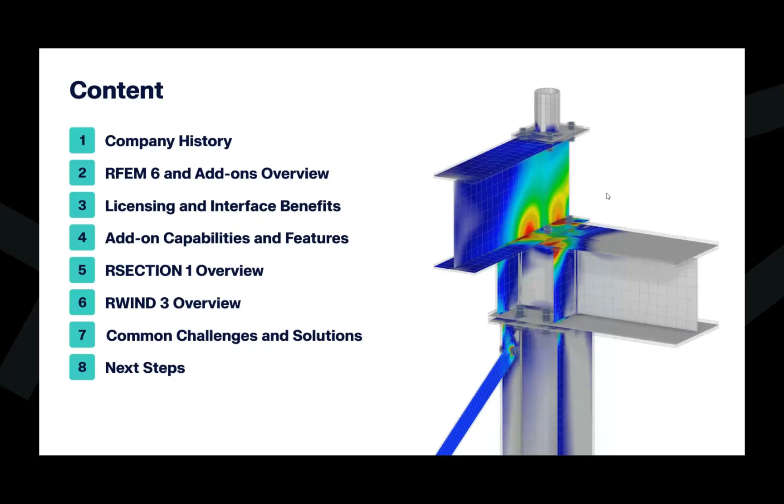So we'll begin now with a little bit more about the company and the history. Dlubal Software was founded in 1987, so we're by no means new to the structural analysis and design software market.

But in the summer of 2015, we opened up our USA subsidiary office in Philadelphia. As it stands now, our company has over 300 employees devoted entirely to the Dlubal program, so we're certainly not trying to balance hundreds of different programs - the structural engineering software is our main focus. Since establishing this office in 2015, we've been able to grow our customer database to over 250 offices throughout the US and Canada.

So now moving on to RFEM 6. This is going to be the flagship of the software that we offer - our general FEA program that we'll continue to dive into the details here for the structural analysis and design. For those of you not familiar with our software, RFEM 6 is the base program.

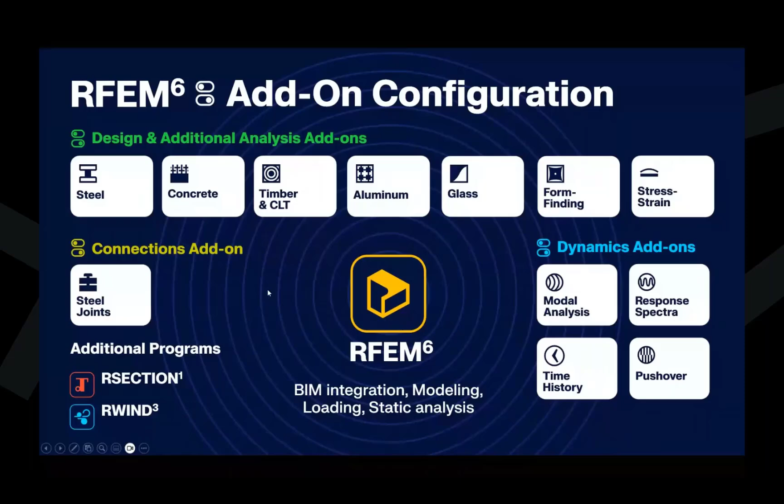So we'll talk about a few benefits of RFEM 6 licensing. We still offer the ability to outright purchase your license. A lot of companies have done away with this, only offering subscriptions, but we still offer this perpetual license option. You can choose to do a subscription, or you can even rent for a shorter duration, such as 1, 3, or 6 months.

As mentioned, with this modular concept, this allows us to create affordable software specific to your design needs, so you're not purchasing capabilities that you don't necessarily use in your day-to-day design. We also moved entirely to cloud licensing for this new version, so it's very easy to share the license between multiple users in the same company, or to access at home or at work.

We also release a new program version every single Monday, which is definitely different than a lot of those competitor programs out there. The reason we're doing this is because we're putting so much effort into new features, developments, code updates, and program fixes that we want to make accessible to you every single week.

We also have a reliable support team located here in Philadelphia with our engineers, so they're able to answer any questions you may have. If you've ever visited our website, dlubal.com, you'll also find access to hundreds of free online webinars, technical articles, FAQs, and more—not just for existing customers, but also for anybody interested in testing out the program.

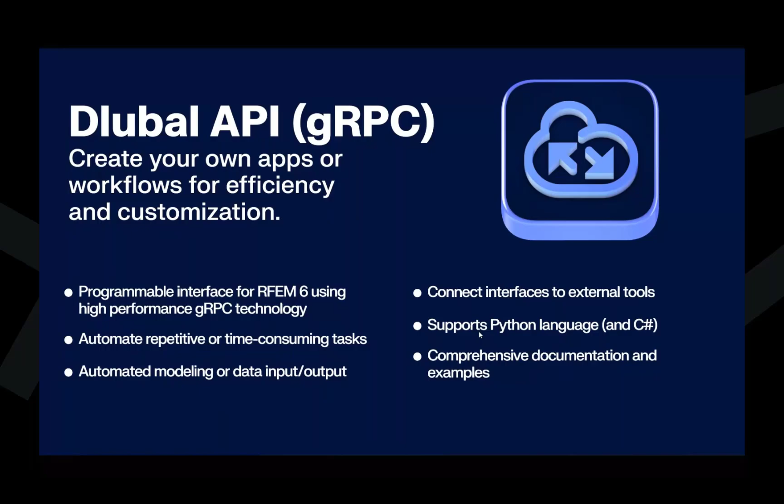So let us move on now to the actual program within RFEM 6. We completely rewrote RFEM 6 from scratch several years ago—we didn't take an old version and build off that old interface and technology. This allowed us to create this incredibly powerful nonlinear analysis program with a user-friendly interface. We have a lot of CAD-style modeling tools like snap points, drag and drop. You can mirror, you can extend lines or members—a lot of the same tools you'll find in AutoCAD.

We also wanted to improve the analysis and design workflow, meaning we didn't want analysis and design to be a two-part process between the base program and the add-ons, but rather one fluid workflow for that modeling—analysis and design together. The program also has a lot of default saved views.

So if we have an extremely large structure and we're trying to filter based on a particular member cross-section or a material, this is already built into the program, but you can always create your own user-defined saved views as well to quickly navigate to certain portions of the structure. Again, very useful for these larger structure types.

All of the toolbars up at the top are adjustable or customizable, meaning you can add additional tools or buttons, rearrange them, and even assign some of these tasks to hotkeys directly on your keyboard.

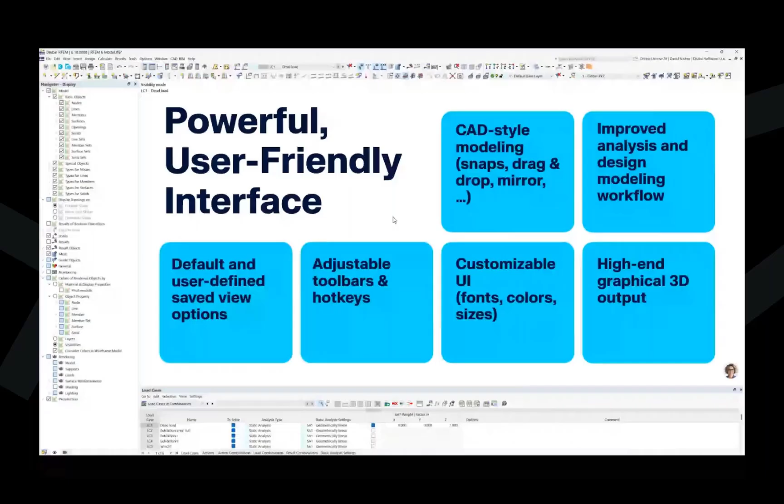So turning now to the specific add-ons, we'll start with the steel design add-on. Again, integrated within the base program RFEM 6, this allows us to take the analysis results and carry out both the hot rolled and cold form steel design of members according to the USA and Canadian standards.

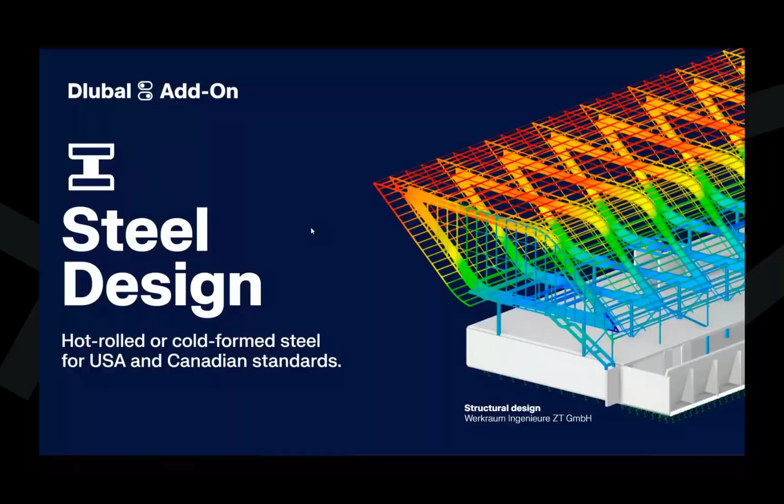We'll start off with hot rolled steel design in particular, and this does include the AISC 360 that you see here, as well as the CSA S16 and other international standards. So you have access to all codes when you do purchase this add-on.

Now, we also have updated the intelligent effective length member input. So we can automatically detect nodes that are framing into a member, and this all comes into play for topics like unbraced lengths that will be used in the design workflow. So again, kind of that intelligence there to detect where members are framing in and use that within the design itself.

We have an eigenvalue solver for the lateral torsional buckling critical moment capacity, and we would want to use this in scenarios where maybe the code doesn't necessarily address lateral torsional buckling. For example, members that are not in a single plane that we see over here on the right-hand side. The code doesn't necessarily address that, so we can activate this eigenvalue solver for LTB, and we'll determine the critical moment capacity from this separate calculation.

Now, alternatively, if you do just have a simple member and you want to design according to chapter F from the AISC for LTB, this is also possible.

You'll hear me say this over and over again, that all of our design add-ons, including the steel design, come with complete design output, including the formulas, the variables, and the code references. So the complete opposite of a black box, we're trying to be as transparent as possible about where all of this information is coming from, so you as a user have access to that.

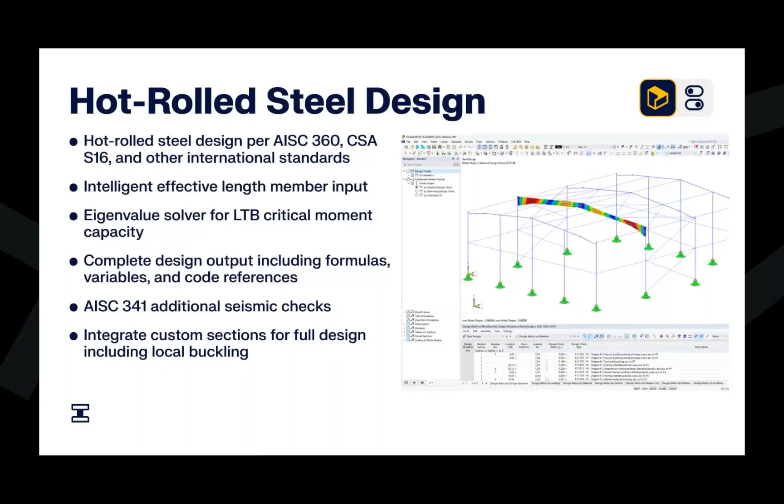Moving on to cold form steel design, this includes the AISI and the CSA S136 standards. We have the ability here to design those cross sections that you find from these codes, but it's quite common to also have custom cross sections. So you might find the parametric sections directly in RFEM that are available. We have a good handful there.

Or again, integrating from RSECTION for much more complex custom cross sections. I'll mention this here and a few more times as well. The really powerful thing when we're talking about cold form steel or ADM aluminum sections is the ability to also design these members, but check local buckling. So not all competitor programs are able to do that.

Specific to cold form steel design and buckling, we have implemented the direct strength method. This gives us a little bit more accurate buckling strength predictions versus a little bit more antiquated approach with the effective width method. So again, utilizing direct strength method.

Within this, we also utilize the finite strip method for section buckling mode curves. So for every cross section, whether it's from the standard or a custom cross section, you can see on the right hand side that with the finite strip method, we display the local, distortional, and global buckling curves. You can even see the distorted shape here as well, and we come up with the total curve, which is ultimately used in the design workflow according to these standards.

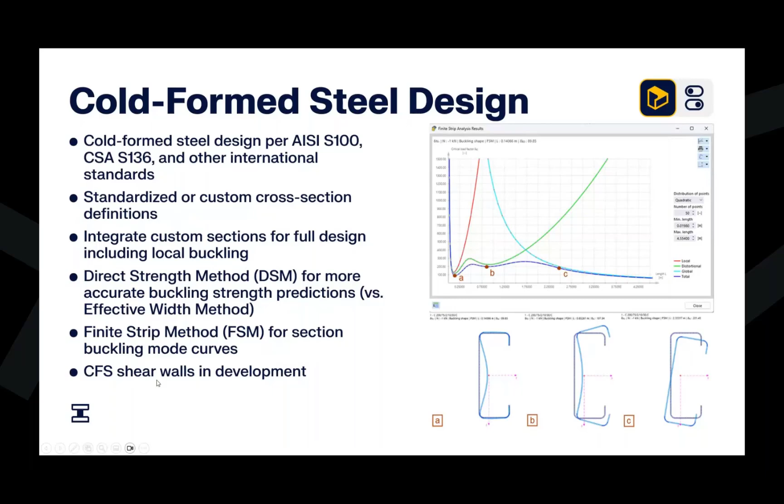On a related topic, we have our steel connection design, and this is certainly a bit more unique than a lot of the connection design programs out there. The main reason is because we utilize the component-based finite element method. So for every connection, we are building up an FEA model underneath the hood. And why this is powerful is because this gives us the ability to design any connection. We're not just limited to the standard beam to column to brace.

The AISC 360 is available. The CSA S16 is currently in development. We hope to release that towards the end of the year.

A couple more points that set us apart from other connection design programs: you can carry out the full member design and connection design in one file. So we no longer have to export out these member end forces. You can imagine we have less data loss, or if we need to update the model, we're not having to re-export out those member end forces each time. Everything is working seamlessly together.

We do have a predefined library for a lot of common connection types that you can choose from, or you can build up your own with the individual components and save that to your user-defined library for future RFEM models. We'll take a look at that on the next slide in just a minute.

Full base plate design is also included with the ACI design checks for that foundation block. Another unique point is that we can fully calculate the stiffness of this connection. So with connections, they're typically not fully pinned and not fully rigid, but somewhere in between.

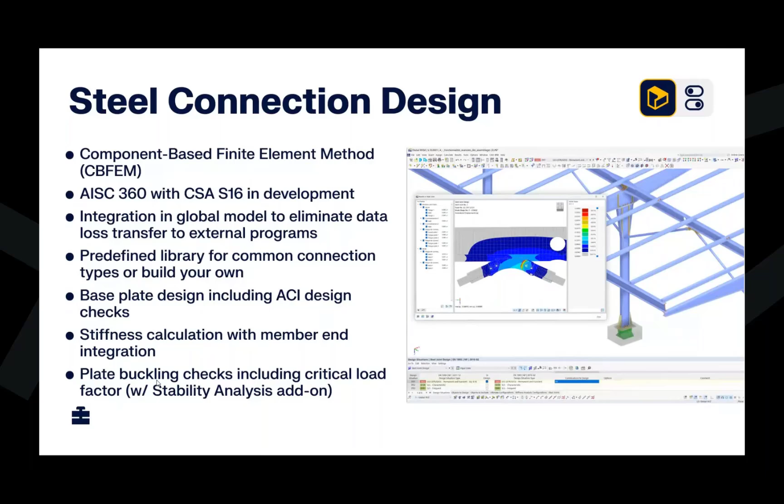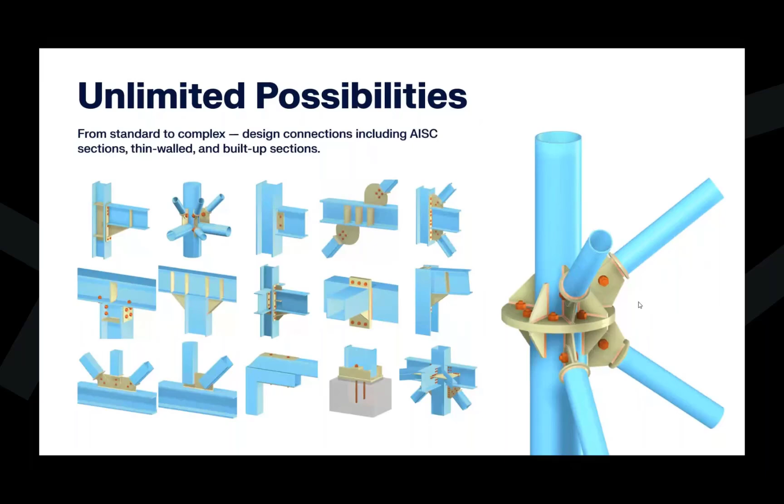And for the design, again, we build up this FEA model underneath the hood automatically. We check the bolts and the welds according to the AISC standard, and all plate elements are checked compared to the limiting strain value set.

Moving forward to the concrete design add-on. This allows us to carry out the reinforced concrete design from everything from beams and columns to walls and slabs.

The ACI 318 and the CSA A23 are fully implemented here, as well as other international standards that we offer. We can input the reinforcement and get full design according to these codes for beams and columns. If we have a column, the column 3D interaction diagram will be available to you as well.

We can also carry out the reinforcement design of plate and slab elements. This could be a slab on grade, for example, with a spring support underneath it, an elevated slab, or a general wall element.

We have two methods when it comes to slab design: either the FEA approach, where we provide ISO lines of required reinforcement versus the provided reinforcement, or we've recently implemented the design strip method, which is a bit more common in North America.

We can generate the design strips automatically according to those standards. One thing worth mentioning is that with the design strip method, we're not only looking at the bending moments in a one-way direction of the design strip itself, but we also have the ability to consider the twisting or torsional moment within the design strip. Not all competitors are able to do that. It's a much more simplified approach, but we're also able to consider what we call the MXY moment of that surface element.

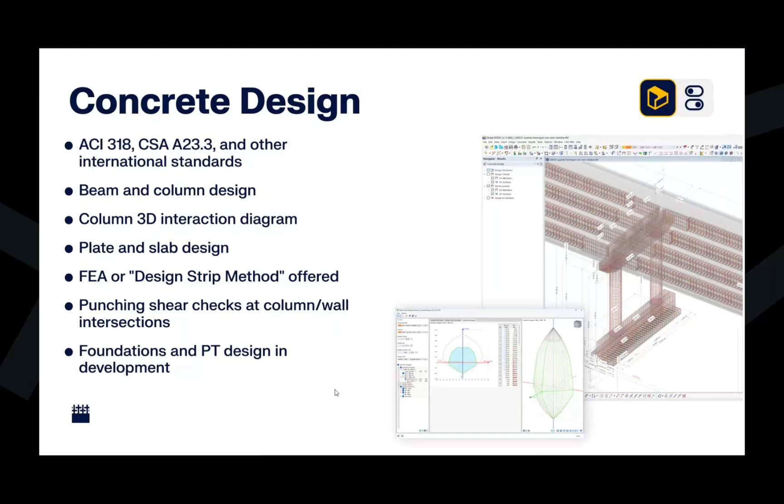Now we have timber design. We're moving a little bit more into capabilities that are not available in all structural analysis programs. We have the ability to design everything from stick frame structures clear up to multi-level story mass timber structures.

The NDS and CSA O86 are included, as well as any other standard that we offer, where we carry out the full strength, serviceability, and fire design of both members and CLT surfaces.

The fire design is a bit unique in that we can actually reduce the cross sections of our members or our CLT panels based on the fire exposure time. We automatically export those reduced cross sections back to the global model, and we rerun the analysis with these reduced stiffnesses because inevitably we have new internal forces.

We then compare those new internal forces to the fire design equations directly from the standards to give us a design ratio. This is entirely separate from the strength and serviceability checks with the full cross section. So it's pretty powerful in the sense that we're able to actually reduce the stiffnesses there within the fire design checks.

Member design includes access to solid sawn, standard timber members. Again, all of those materials and cross sections are available in the main program, but we can also do glulams, including tapered glulams and curved glulams. We will check radial stresses according to the standards so we can get into these more complex scenarios.

In order to define the CLT layup, cross-laminated timber, we do need the multi-layer surfaces add-on. This is kind of paired with the timber design add-on.

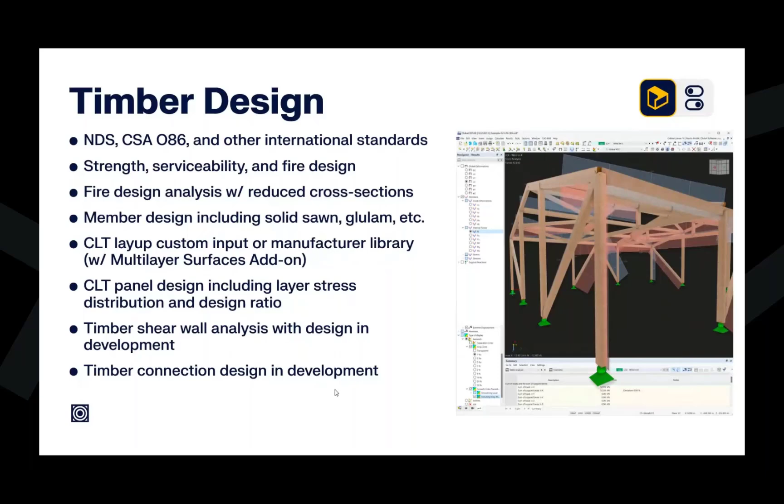Aluminum design is also possible in the program. We can carry out member design, not only of standard sections, but custom extrusions, which is a very big topic when it comes to aluminum. We currently have the ADM standard available, and have for quite some time.

We're also in works right now with the CSA S157. We want to release that within the coming months for full member design according to the Canadian standard. This includes the strength and serviceability design checks for all of our standard shapes found within the ADM. But similar to cold form steel, we can get design of parametric sections, a handful offered within RFEM, or we can utilize our RSECTION tool.

I'll get into the details of our RSECTION tool in a few minutes, but essentially I can bring in a custom extruded shape, like what we see on the right-hand side, and get full member design according to the ADM.

Not only this, but like with cold form steel, we can also get the local buckling checks. Something very unique with our RSECTION to RFEM integration is being able to get the buckling checks for these particular unique members. As far as local buckling methods offered within the ADM, we offer all three, including weighted average, direct strength, or limiting element.

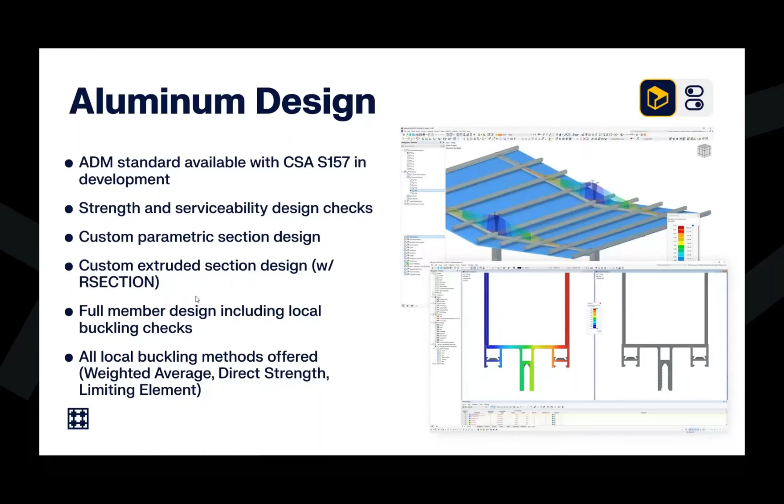So the next very niche add-on is glass design. I place this after aluminum because these tend to go hand in hand, where we can use this glass design add-on to design single glass panels or entire glass systems. As you see here, there are glass stairs, being able to model and design everything from a single panel to these larger structures.

In the current state in RFEM 6, we allow you to define here either single layer or laminated glass panels. You can define the different layers of the laminated glass panels, and specify the shear coupling between those layers as either rigid or free. We see the full stiffness matrix available to us.

Now, insulated glass panels - we previously had this in our older version, RFEM 5, but we wanted to do some updates and modifications to better this analysis and design for IGU panels in RFEM 6. It's not quite ready, but we plan to release that towards the end of this year, integrated directly within the glass design add-on.

What is new in RFEM 6 is the ASTM E1300. We previously did not have this in our older version, but now you can carry out the design checks of these glass panels according to this US standard. As mentioned, we can go ahead and carry out the design with a single panel.

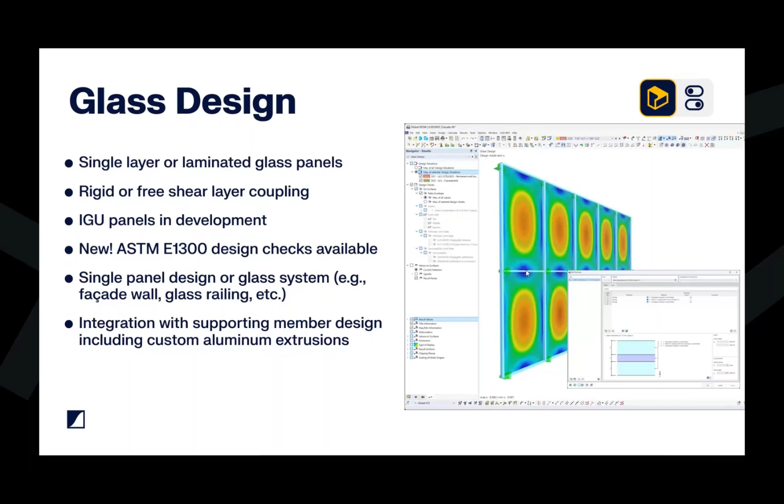We can even specify how these panels are connecting to the members themselves. If we don't want a fully rigid connection, we have the ability to release moment or allow some type of slip depending on that silicone connection joint at these locations. So a lot of capabilities there, but the important point is that we can do the full design of the supporting structure along with the glass panels.

So another niche market that we offer is the form finding analysis. This allows us to determine the catenary shapes for cables and for fabric membranes.

Within RFEM, we have the ability to model a cable element as a completely straight member, or we can model a fabric membrane as a flat, standard surface. Once we input this form finding load, this pre-stress load, the program automatically calculates the best catenary shape for us, so we don't have to model this manually within RFEM.

Now, when we activate this add-on, we have a few different loads available specific to the form finding process. You would go into either the cables or the fabric membranes and set the target geometric loading, such as a target sag or a target length. You can also alternatively specify the target force loading, such as the pre-stress force, the tension, or the force density. Both are possible with these elements.

Now, not only can we do fabric tensile structures, but also pneumatic air-supported membrane structures, such as you see over here on the right-hand side, are also possible with this add-on.

This add-on is not just specific to fabric membranes; we can pair it with the steel design add-on to get the supporting structure design. It's quite common with these fabric membranes that we have steel members as well, so we can carry out full steel member design according to the AISC or CSA standards, without needing a specialty program for the fabric and manually transferring forces into another program for the steel design. Everything is carried out together.

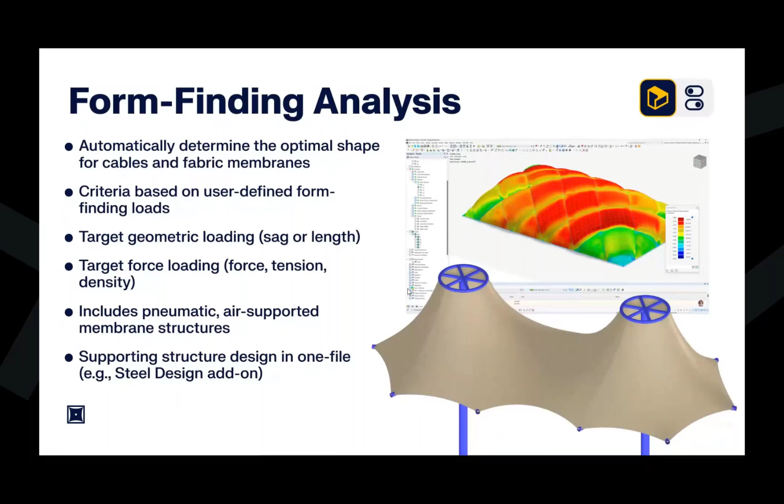Moving on to dynamic analysis. We have several different add-ons depending on the dynamic analysis needs, everything from seismic forces to forced vibrations.

We begin with our first add-on, the modal analysis. This will take our structure and carry out an eigenvalue analysis to determine the natural periods, frequencies, mode shapes, and accelerations. This add-on is always a prerequisite before we can utilize any of the other dynamic add-ons listed here.

If we're interested in carrying out seismic load generation, we would want to utilize the response spectrum analysis add-on. Within this add-on for seismic loads, we have codes implemented such as ASCE7 and the NBC standard. The response spectrum analysis is applicable to any structure type, and that's why we've taken this approach—because not only is this a building program, but we can also do fabric tensile structures, domes, or any type of structure where a response spectrum is applicable.

With that said, we've certainly had a high request for more simplified building structures and the equivalent lateral force procedure. This is something we will also implement in the future, and development has already begun.

We have our third dynamic add-on, the time history analysis, for external excitation. We have the ability to define this force time function, which can be user defined, or we can choose from an accelerogram library if we would like to replicate a seismic load on our structure.

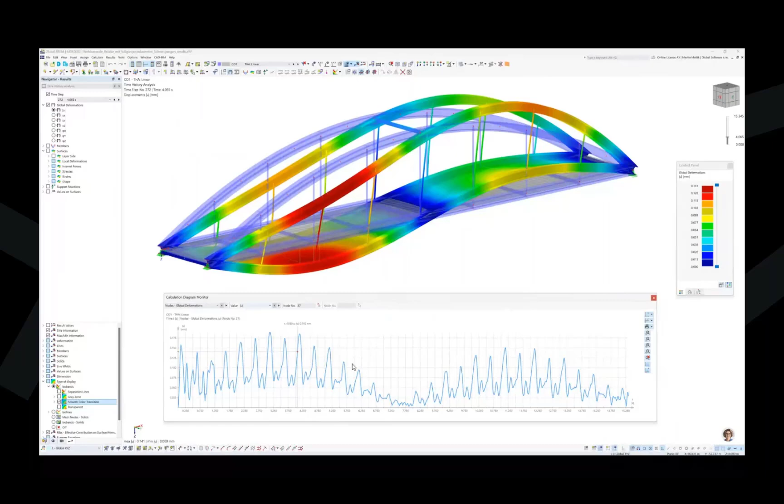Finally, we have our pushover analysis add-on. This is currently according to the N2 method, but we also recognize that something like the capacity spectrum method is heavily utilized with pushover, so we plan to add that in the future as well.

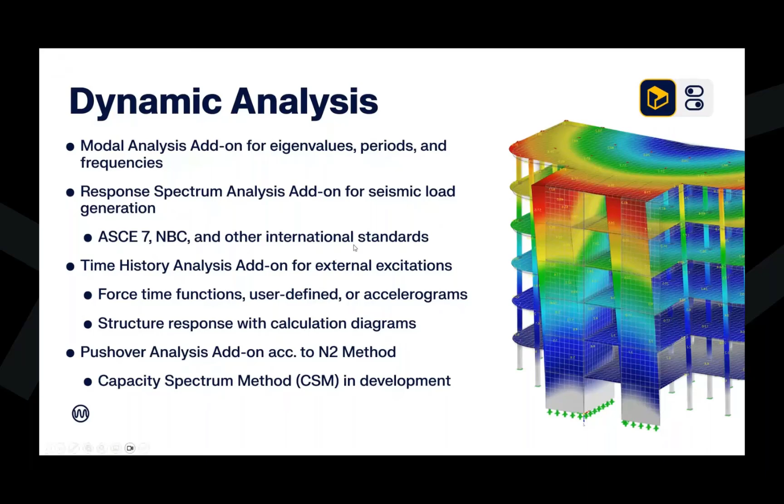Then we have our building model add-on, and this is new within RFEM 6. Keep in mind RFEM 6 is a general FEA program, so we are not limited to just buildings, but really anything is possible. That said, we have developed this building model add-on to be more competitive with those building-specific programs out there, but again, all in the same program.

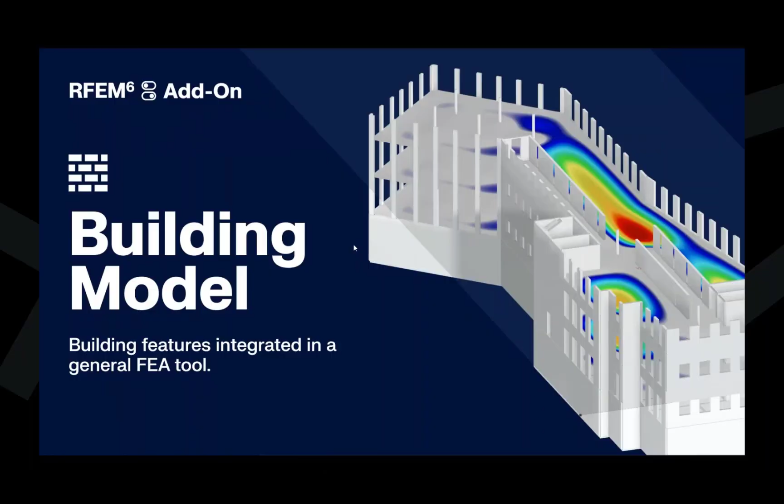Now when we enable this add-on, we have the ability to define stories in this general FEA program. Otherwise, the program doesn't really recognize what a story or a floor is. This also releases these multi-story modeling tools.

For example, if I have a column at the same location at every story, at the click of a button, I'm able to place that column continuously. Whereas without these multi-story modeling tools, I would have to manually replicate that column at each story level.

This also releases our diaphragms. Within the building model add-on, we can specify rigid, semi-rigid, and flexible diaphragms. I will jump to this next slide quickly to speak a little bit more about the diaphragms and the stiffnesses that we offer. Again, we have these various diaphragm types.

When we have defined these different stories and specified a rigid or semi-rigid diaphragm, we actually separate out the analysis into two separate calculations, the gravity versus the lateral. With this, we will extract out the floor elements and only apply those gravity loads. As far as the stiffness, we'll actually use the true stiffness of the material, of the thickness that's been defined for that floor. But when we look at the lateral calculation, we will modify the stiffness of those floors.

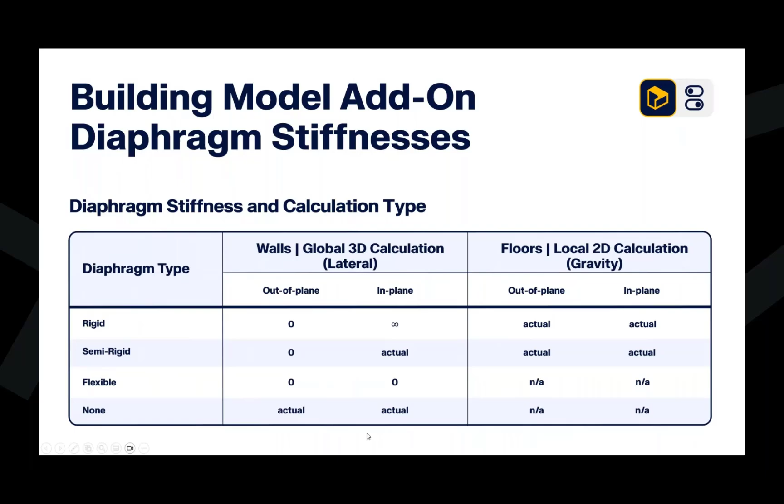So for rigid, we'll use an infinitely rigid stiffness in the in-plane direction, with the out-of-plane set to 0. Semi-rigid, out-of-plane is also set to 0, but the in-plane is set to the actual stiffness. Now, when we use a flexible diaphragm, or we don't define any diaphragm at all, we are going to carry out just one analysis calculation like we would with a general FEA model, lateral and gravity together, using the relevant stiffnesses defined here.

Now, with the result output, when we have enabled the building model add-on, we do get some very user-friendly table options in the sense that at every story, I can now view information like center of mass, center of rigidity. I can view story drift and story shear, which might be really important for seismic analysis. Again, just putting that in a little bit more user-friendly format for each individual story level.

When we also pair this with the concrete design add-on, we are going to get additional design checks for shear walls. Referencing the ACI specifically, Chapter 11, we will carry out additional design checks for that reinforcement design of shear walls specifically to that chapter, as well as spandrels, otherwise known as deep beams in our program. We can also design those when these two add-ons are integrated together.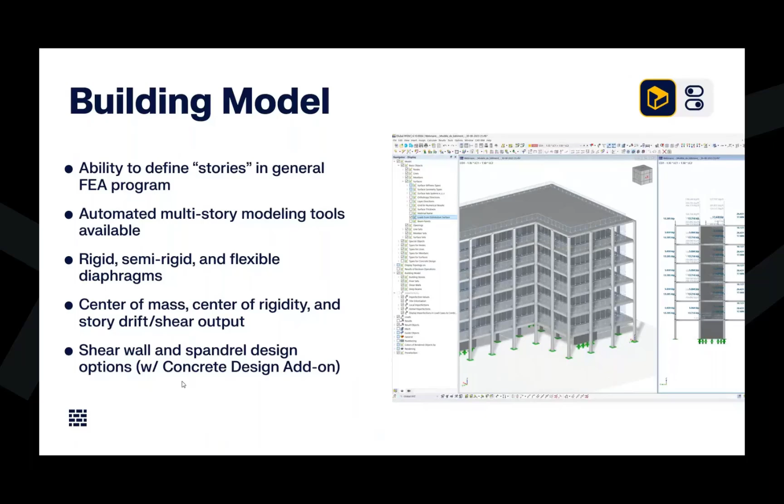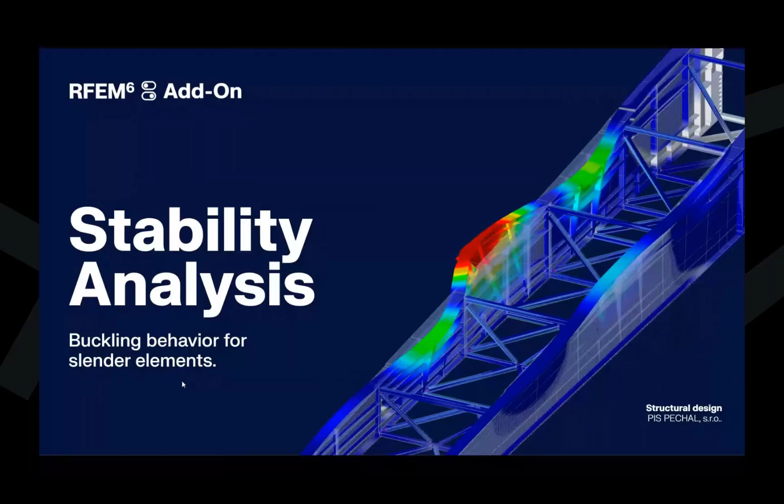And our final add-on within RFEM 6 is my favorite, the stability analysis. This will actually carry out the buckling behavior of slender elements. So if we have very slender members in our models, or very thin-walled surfaces or even solids, we can take each one of the load cases or the load combinations and additionally carry out this stability analysis to determine the flexural buckling failure modes. And we get a graphical display of the failure mode shape directly within RFEM, again, for each one of these load cases or load combinations.

And depending on how many eigenvalues we solve for, we can see the relevant mode shape, but we also get the associated critical load factors. So what's the factor that I can multiply by my applied loads before I see my structure or my elements fail with that relevant buckling mode shape?

We can take this information too and integrate it in other parts of the program. For example, member or surface imperfections - I could take my buckling mode shape of a surface element and scale it, and actually deform the FE mesh of that surface element before I carry out a general static analysis. Or we could import these critical load factors as effective length factors for our steel design. So a lot of different options there, again, extending to other parts of the program.

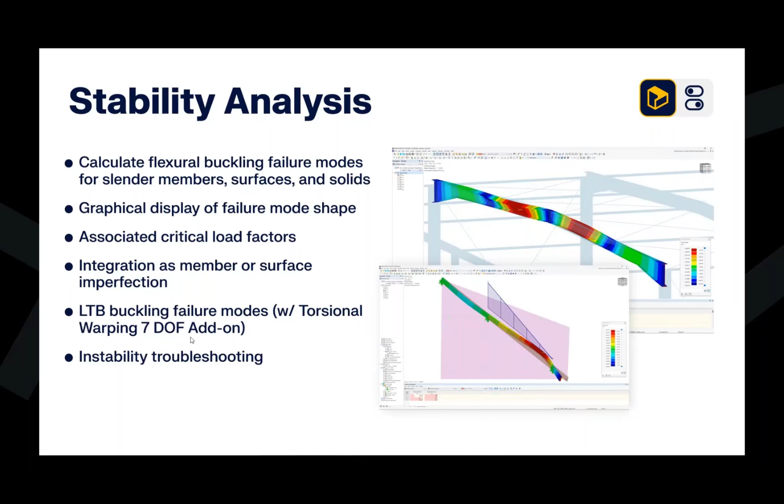So now we'll move away from RFEM and into a couple of our standalone programs. You've heard me mention our RSection program—this helps us calculate the properties of custom cross sections. Within this standalone program, we have the ability to calculate either for thin-walled elements or an FEA analysis type, and both options are offered for thin-walled cross sections or for more massive type sections like concrete.

If you want to create your cross section, for example built-up cross sections, you have access to all the same cross sections and materials that you do in RFEM—an extensive library of rolled, parametric, thin-walled, or even massive cross sections. But you can also import something like a DXF file, which is quite common for an aluminum extrusion.

When we calculate according to the thin-walled analysis, we generate these elements on the cross section. These elements provide the information for each element part of our cross section—we know the width, the thickness, and whether it's supported at one end or both ends. That way, when we bring this into RFEM to carry out the full design, we're able to carry out the local buckling check, for example according to ADM chapter B, because we have all this information directly from RSection.

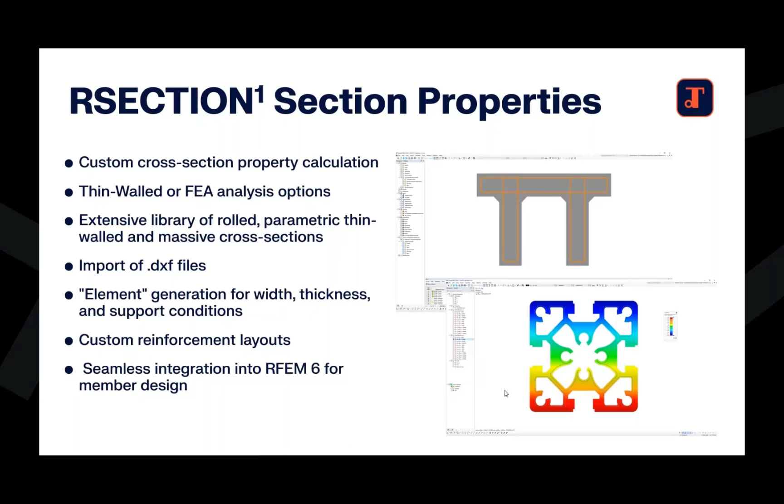Moving on now to our RWIND 3—this is our CFD wind analysis program where we utilize a numerical wind tunnel. For those not familiar with CFD, this is computational fluid dynamic analysis, where essentially we take our structure and put it into this numerical wind tunnel to determine what these wind pressures are.

Our RWIND program can certainly be used as a standalone. We have architects, for example, taking advantage of this—it's not necessarily just for the structural engineer. You could import an IFC file, because all we need is the geometry to determine what these wind pressures are.

But the powerful thing is integrating, of course, with RFEM 6. We can automatically send our structure from RFEM 6 into RWIND, calculate the wind pressures, and then bring the wind pressure information back into RFEM 6. When integrating with RFEM 6, we also have the ability to automatically generate the wind profile according to codes such as ASCE 7 and NBC.

This is not to be confused—CFD is entirely code independent. What I mean is that the wind velocity entering the wind tunnel can be generated according to these codes, taking into account some of the different coefficients, such as what the wind speed is as a function of the tunnel height.

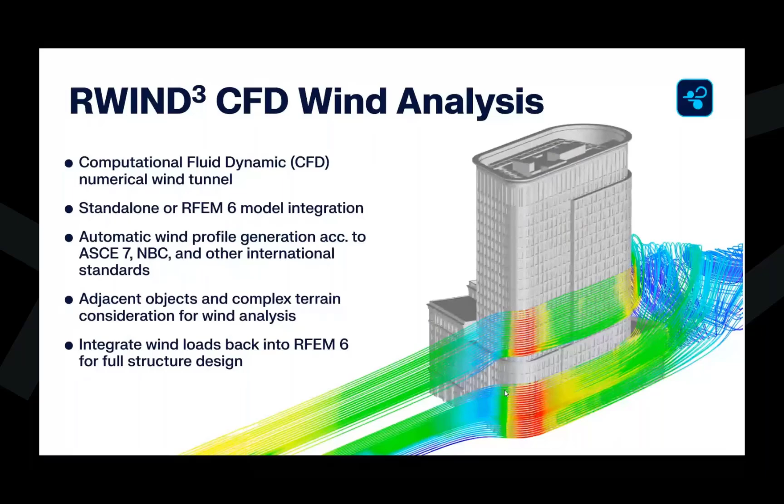That way we can then combine with other load cases like live load and snow load, and continue on with our analysis and design. So we might be wondering, why would we want to use a program like RWIND? I wanted to go through a few advantages here.

This can be a really powerful tool for wind analysis very early on in the design stages. If we're toying around with different geometries, or we get this information from the architect and we're interested to know what the wind loads are early on, it's very quick and efficient to just put it into this numerical wind tunnel.

We also can use this program to determine occupant comfort, or as I mentioned on the previous slide, to consider surrounding objects or complex terrains.

Now, if your project does require a true wind tunnel test, and there's no way around that, this tool can also be used. You can put your structure into this numerical wind tunnel, adjust the design before spending the time and money to carry out the true wind tunnel test to determine that our design is not adequate. So being able to make those modifications very early on.

Ultimately, we recommend something like RWIND for structures that are completely outside the standard minimum guidelines given from ASCE 7 or the NBC. We would never recommend this program for a box type structure. The code is very clear on how to apply wind loads there. You could use the automatic wind load generator directly within RFEM 6 according to those codes.

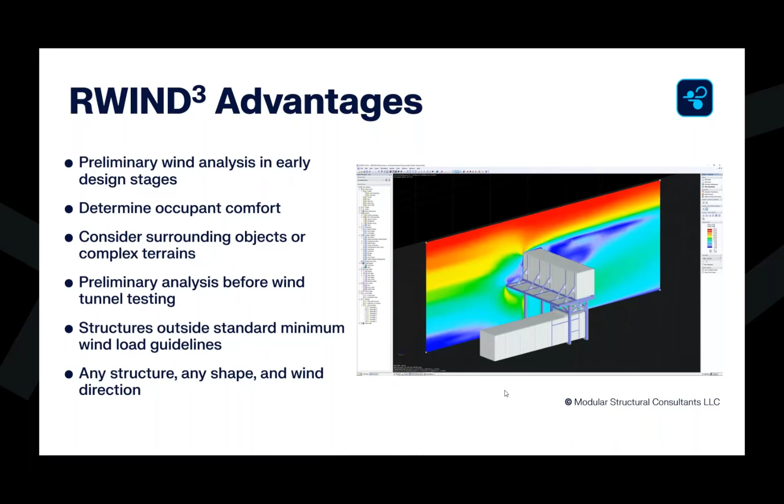In the final 10 minutes here, we want to talk about some common challenges that you may be experiencing in your current structural analysis software, and where we hope that Dlubal may be a better solution.

We'll begin with the topic of lack of program development. A very common complaint I hear is that the current program's interface is clunky, old, and outdated, the technology just isn't there anymore. As I mentioned, RFEM 6 and our other standalone programs were completely rebuilt from the ground up.

We chose a modern programming language with cutting edge technology, and this is what has allowed us to produce these very high quality graphics and a user-friendly interface. Our calculation report is extremely powerful. This brings me to my last point, we can also output transparent, traceable results.

In older programs, we're just finding a design ratio and that's it. So we're very much moving away from this black box software to provide you, the user, with as much information as possible. Implementing this latest technology has allowed us to do so.

I'll jump to this next slide quickly to show you an example of the output. In all of our design add-ons, whether it's concrete, steel, timber, aluminum, whatever it may be, we get the design checks on both members and surfaces.

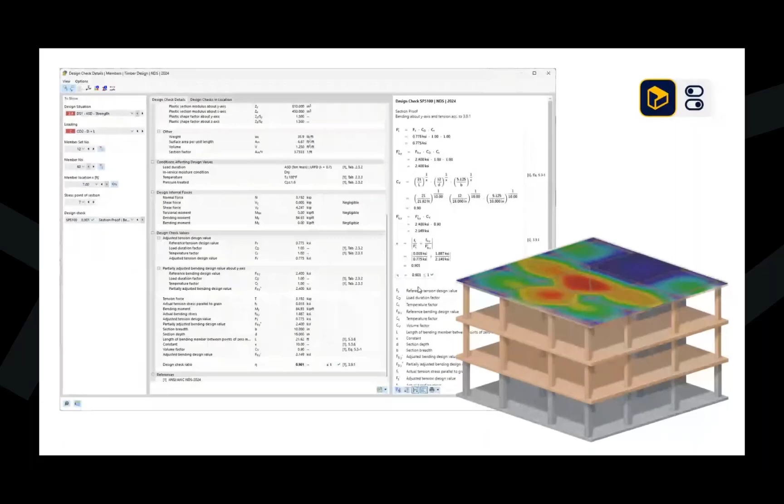The other related challenge I hear is paying high fees each year and seeing very little in return. You might be left wondering, okay, I'm paying these subscription fees or maintenance fees, and I get one or two releases per year, but I really don't see anything new in the program.

As mentioned, we are coming out with a new release every single Monday for our programs. You don't have to update every Monday, but that option is there for you. That's because we're constantly adding new features and improvements, listening to our customers' feedback, trying to better the program.

When new codes are released, we're working as quickly as possible to get those into the program, and it also allows us to provide quick fixes for program issues. These are inevitable no matter what program you're using, but the question is, are you waiting eight months for the next program release to see that fix addressed? Or within our programs, are you waiting a week, because we're able to quickly get that fixed, and the following week you update and have access to that fix for your issue.

The next topic is purchase and usage restrictions. Another challenge here is: my software has moved to a subscription-only model. Our philosophy is that we still offer the perpetual license option, and we plan to do this indefinitely, so you can spend a one-time fee and outright own your license.

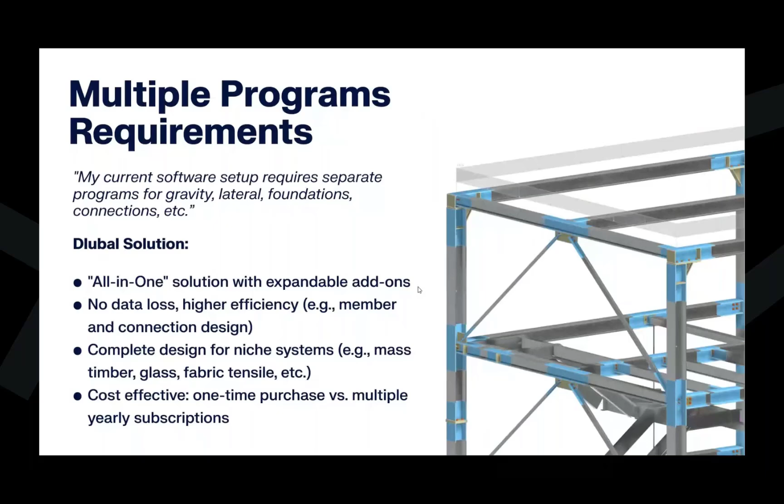Now, if neither of these is working for you and you'd like to contact our support team in Philadelphia, of course we're always here for you, whether you're testing out the program or you're an existing customer. And finally, we do offer custom online or in-person training if that is applicable.